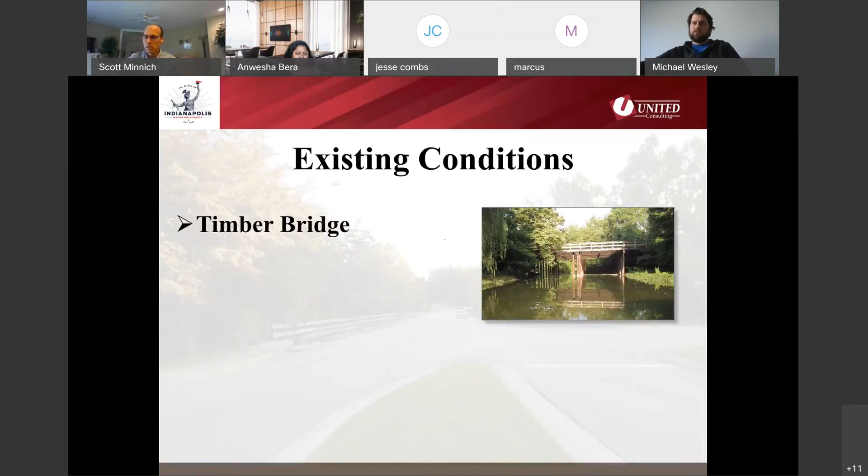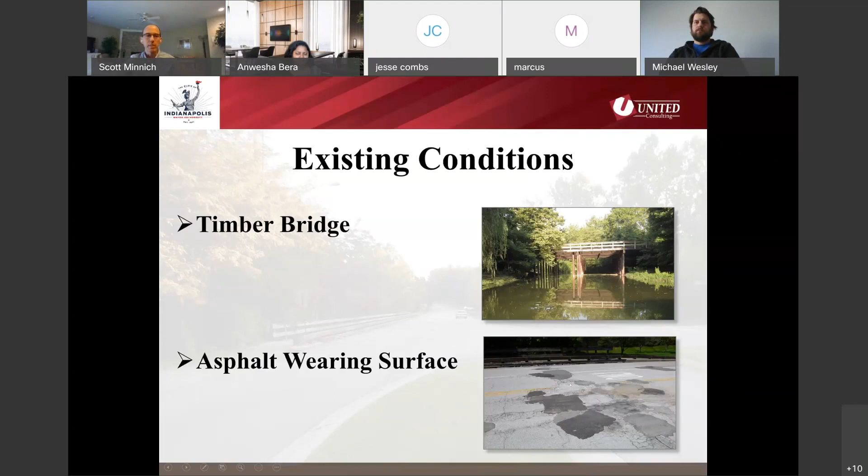So existing conditions: the old bridge that is there now is a timber bridge. That's a picture of it looking down the reservoir. And the asphalt wearing surface, we all remember back in the spring, back in February, this is what it looked like. The city did go out and strip patch that back in the spring to make it serviceable until we could get to the time of construction. It certainly looks much better than that now, but as we saw how quickly the last wearing surface deteriorated, we would expect what's on there now would do the same if we didn't get to construction and replacing this bridge.

So let's do a little comparison of what you have there now versus what you're going to have there when we're all done with construction. So old bridge versus new bridge. Old bridge is made of timber. New bridge is going to be made of concrete with reinforcing steel and pre-stressing strands inside the concrete. The old bridge was 12 spans of 26 feet each. Timber can't span all that far and carry heavy vehicular traffic. A concrete bridge can do much better with vehicular traffic. We're only going to have 2 spans, each of those being 107 feet long.

The old bridge was 311 feet total in length. A little bit of that bridge length was not really necessary with what we can do with a concrete bridge and the way we can form up the ends of the bridge. So we were actually able to shorten the bridge to 214 feet. That still allows adequate flow of the channel through there, allows Geist Reservoir to do what it needs to do, as well as North Fork Dry Branch, which is a small creek that is closer to the intersection to the south that also goes under the bridge.

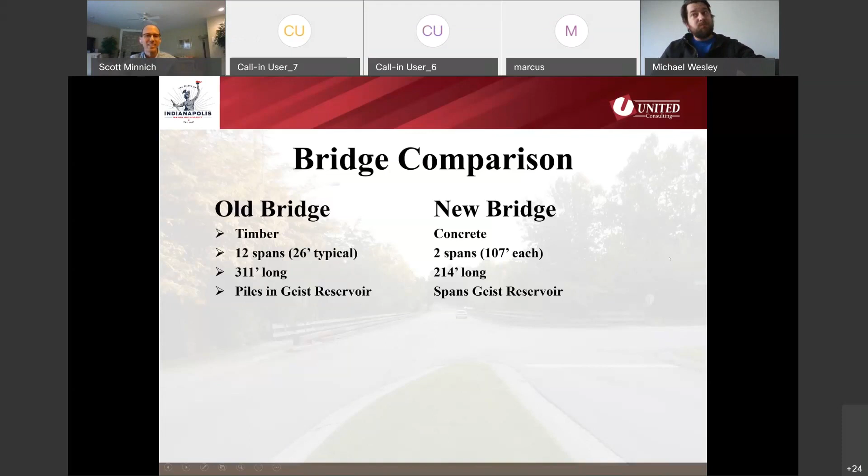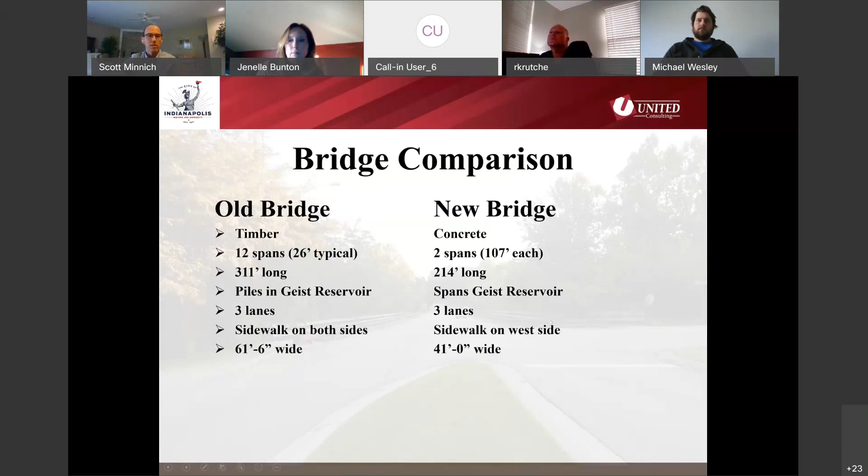So the old bridge has 3 lanes of traffic, 1 lane going in, 2 lanes coming out, with one of those exit lanes being a left turn lane. The new bridge will have the same configuration. The old bridge has a sidewalk on both the east and the west side. The new bridge is only going to have a sidewalk on the west side. The east side sidewalk that is on the bridge right now doesn't lead anywhere. There's no connecting sidewalk going north or south from that east sidewalk. So with that, the bridge is going to get a little smaller width-wise as well. We were at 61.5 feet wide with the old bridge. New bridge will be 41 feet wide.

Underneath the bridge, we'll have vertical clearance for boat traffic. The old bridge has 12 feet of vertical clearance. The new bridge, that's going to be reduced a little bit to 10 foot 3 inches of vertical clearance. That's from normal Geist Reservoir elevation up to the low structure elevation up above. So we have reduced that a little bit, but for comparison, the Fall Creek Road Bridge has about 9 foot 9 inches of clearance. So if you put your boat in the reservoir up at Olio Road, you have to go under Fall Creek Road Bridge to get to this bridge. If you can make it under Fall Creek, you'll make it under this bridge when we're done. And then, of course, the old bridge had lots of pothole problems. The new bridge, no potholes.

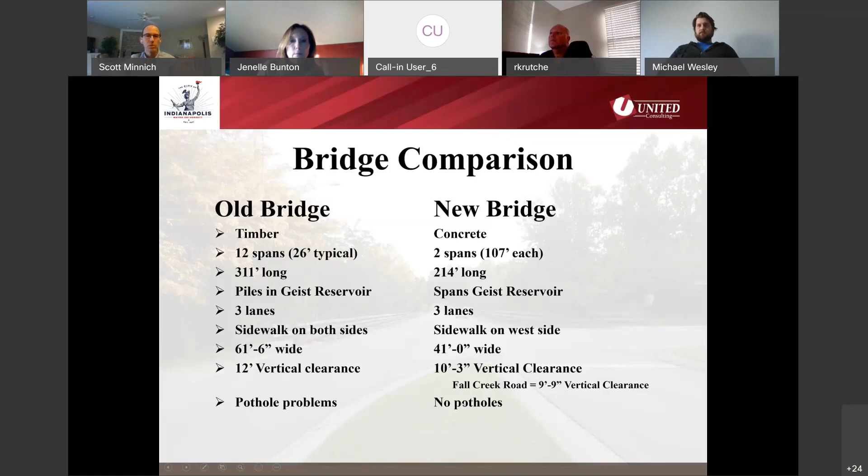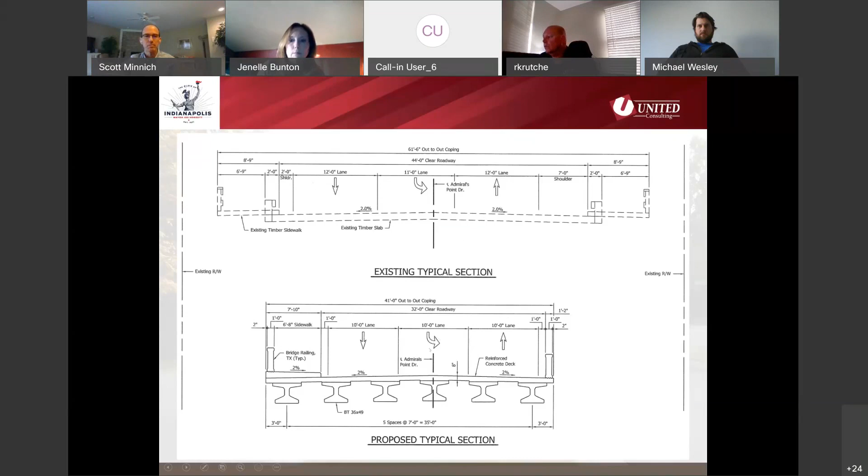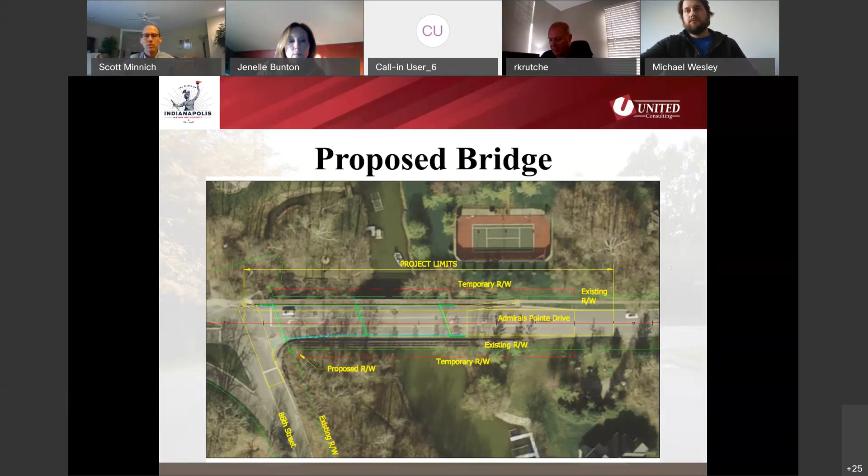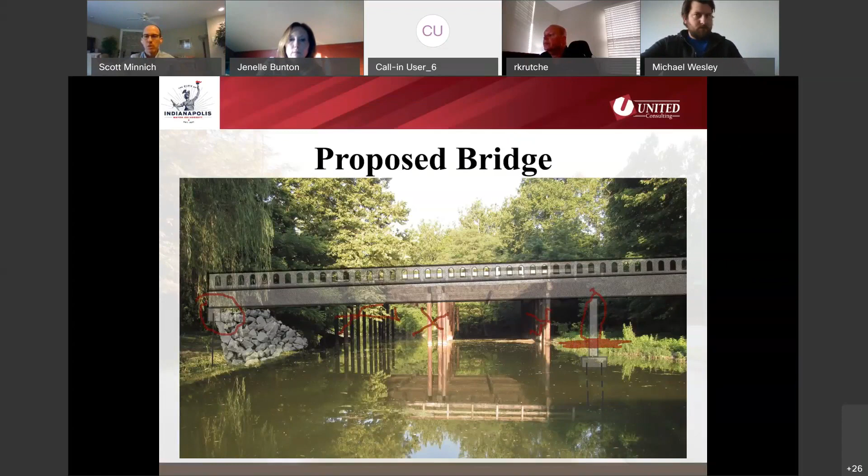And then we'll have a new substructure to the far left over here, and a new substructure unit here. And then the bridge will stand between that. And actually the pier here, this is going to be ground elevation. Everything below this line that I'm drawing very large here now, everything below that's underground. So there actually will be nothing in the channel at that location.

So let's talk about traffic during construction. In order to build this bridge, we have to tear the old one out and then build a new one. We will have to close Admirals Point Drive during construction. And we'll be closing that completely from Old Stone Drive all the way down to 86th Street, and including most of the intersection of 86th Street and Oaklandon Road.

We'll have a marked detour during construction, which could go down the yellow dashed line you see on this picture. That'll cover Old Stone Drive, Carroll Road, and 79th Street. Obviously, if you live in the neighborhood, you certainly know the area, and if you're going a different direction or going somewhere else, you can certainly follow different routes to get to where you need to go.

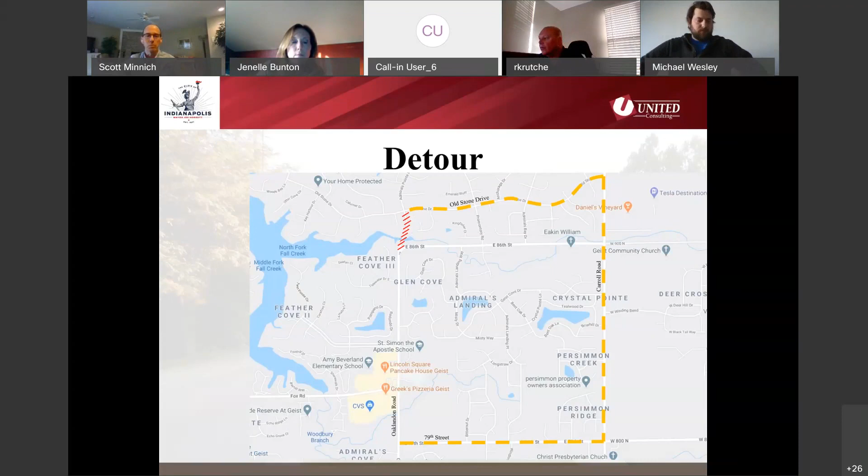So a little bit of a blow up here now, an aerial view looking down of the intersection of 86th Street, Oaklandon Road, and Admirals Point Drive, the intersection just south of the bridge. Everything crosshatched there will be closed during construction. The only thing that will remain open will be northbound Oaklandon traffic going to eastbound 86th Street.

So everybody going westbound on 86th Street is not going to be able to make it. Westbound 86th Street is going to be closed off at Promontory Road. So westbound 86th Street is going to be blocked off right here. Eastbound traffic going that direction will be able to maintain, but no westbound traffic through here. And there's a reason for that I'm going to show you on the next slide.

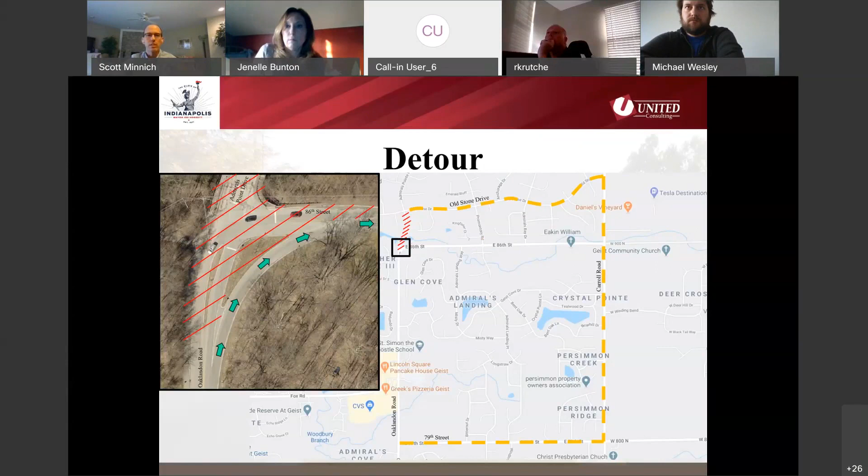At the first public meeting, the question of pedestrian access came up. At the time, we were taking out the sidewalk across the bridge, and there was no pedestrian access being provided. So we now have added to the project at the request from the first public meeting, pedestrian detour and pedestrian access to get around the closed bridge.

So we'll have a marked pedestrian detour that will follow this dashed yellow line that will go down the existing sidewalks on Old Stone Drive and Promontory Road. And then the pedestrians during construction will follow down 86th Street. There are no sidewalks there now, so they will actually be walking down the north lane of 86th Street. We will have that north lane blocked from traffic that's in the south lane. That'll be separated with a temporary concrete barrier.

And that concrete barrier will also turn and cross over 86th Street at Promontory Road so that no vehicles can get into that area. So we'll have barrier crossing here just in the north lane and then barrier down the middle of the road here that will separate the vehicular traffic that is going to the east. Pedestrian traffic will be in the north lane with the ability to go east or west.

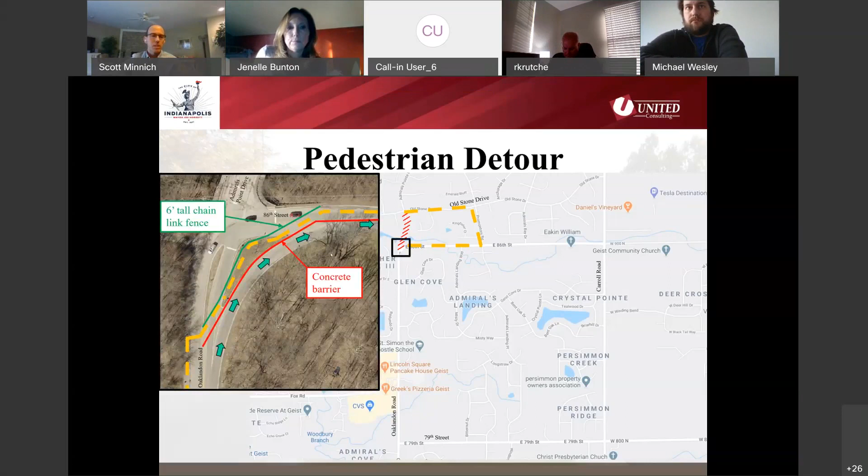So at the intersection with Admirals Point Drive, 86th Street, and Oaklandon Road, we've still got to get pedestrian traffic through there. The dashed yellow line represents the approximate route pedestrian traffic will follow. The red line represents a concrete barrier that will separate vehicular traffic from pedestrians. The green line shown along there represents a 6-foot tall chain link fence that will be temporarily installed during construction to separate pedestrians from the construction going on.

Now down at the south, the contractor is going to be working in the intersection. He needs to bring materials in, and he'll be bringing them in through that area I've circled, so pedestrians will be crossing there as well. The contractor is responsible for flagging when he's bringing materials in and out, but we'd also ask pedestrians, when using it, to use your normal common sense when crossing the street—look both ways, that kind of thing.

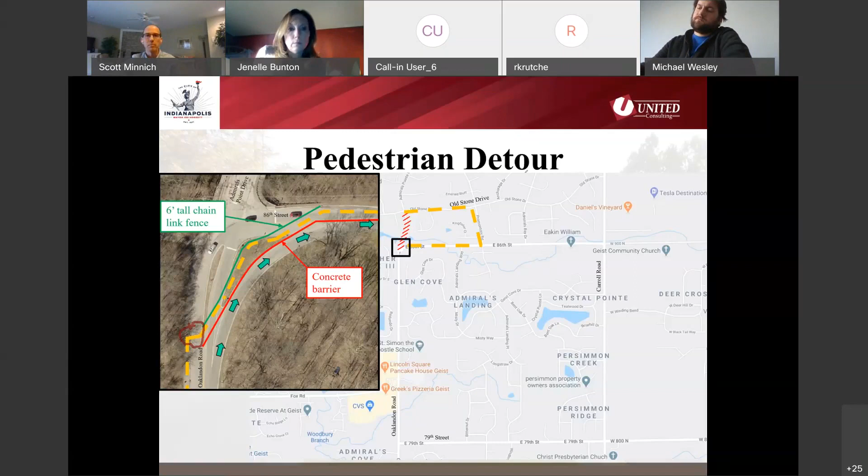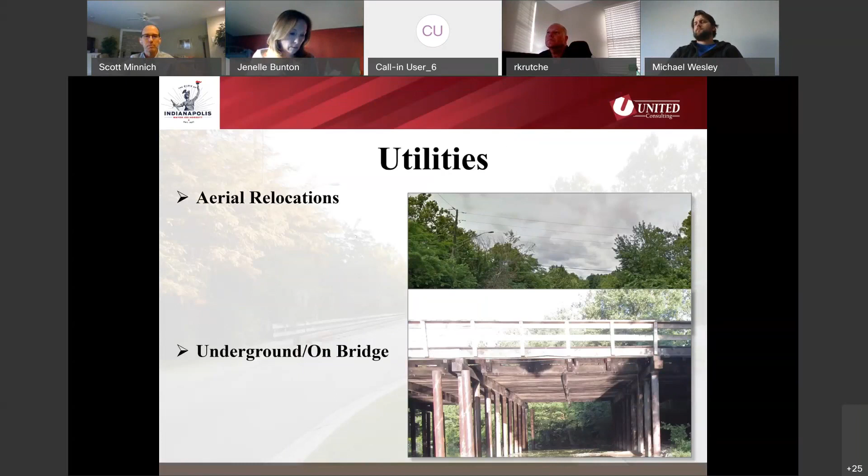So let's talk schedule—that's the big topic for tonight. I will say that the schedule I'm going to put up below here is subject to weather. We are doing construction outside, so certainly weather becomes an issue. When we put schedules together, we do account for typical weather. So when I say subject to weather, it's subject to non-typical weather.

We know we're going to be working through the winter and the spring. We know the weather's going to be cold, we're going to have snow, we're going to have a wet spring. We account for that, but certainly anything out of the ordinary could delay us a little bit. And then the big unknown right now, COVID. While we have proceeded forward in our industry doing bridge and road work through this COVID-19, certainly any major outbreaks with our contractor or with any of the material suppliers could cause some unforeseen delays.

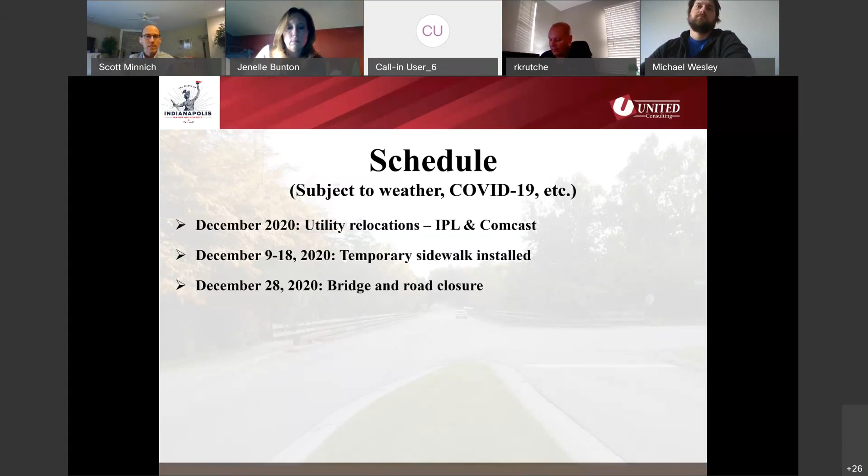So here's our current schedule, where we are right now. December, where we are now, utilities are being relocated—that's IPL and Comcast. Starting as of right now and over the next couple of weeks, the temporary sidewalk that we talked about through the interchange, through the intersection to the south of the bridge, is going to be installed first. And then December 28th is the big day—the contractor's anticipated date to close the bridge and close the road to get started with major construction.

So he's got about 6 months to have the road closed, and here's a quick and dirty idea of what he'll be doing during those 6 months. In January, he's going to be demolishing the existing bridge and removing it. In February and March, he'll be driving piles and building the substructure—that's what will support the bridge.

I would like to point out that during pile driving operations, that is a very noisy operation. We take 14-inch diameter steel piles with a pointed tip on the end, and we basically take a very large hammer and drop it on those piles to drive them into the ground. It is all controlled within a cage so that everything goes exactly where we want it. But we basically hit this pile over and over again and drive it about 50 feet into the ground. There are a lot of them that we have to put in for this construction, so we are going to have some noisy days out there in February and March.

As we proceed forward, when the weather starts getting a little nicer in April, we'll be setting the pre-stressed beams and forming up the bridge deck. Bridge deck is the part that you drive on.

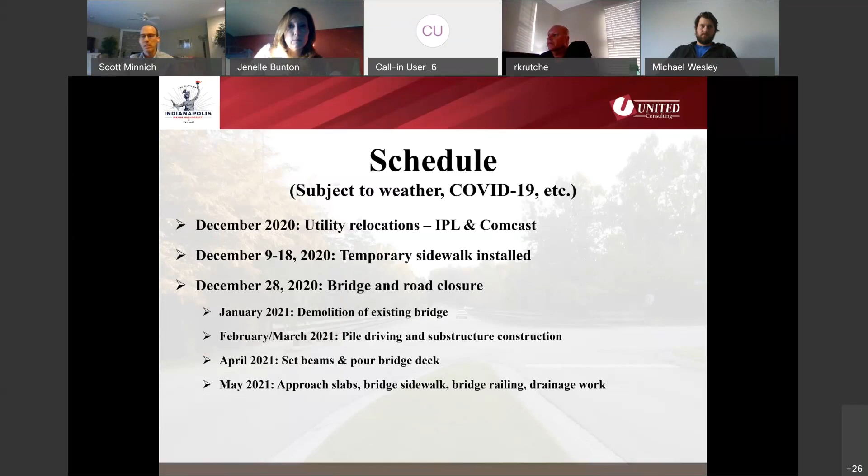We do have a little bit of drainage work going on north of the bridge. The existing drainage there, from our calculations, showed that during a very heavy storm we were probably getting some puddling going on. So we're fixing some of that as part of this project, installing some additional inlets and upsizing some pipes so road drainage can get adequately off there during a large storm.

Then in June of next year, we'll be finishing up the drainage work, working on the approach road work, paving, and revegetating the site. There will be trees planted, as well as grass and some shrubs.

The anticipated date to open the bridge back up to traffic right now is June 26th. Again, that's subject to weather and any other unforeseen problems or issues that might come up during construction, but that is the anticipated planned construction schedule.